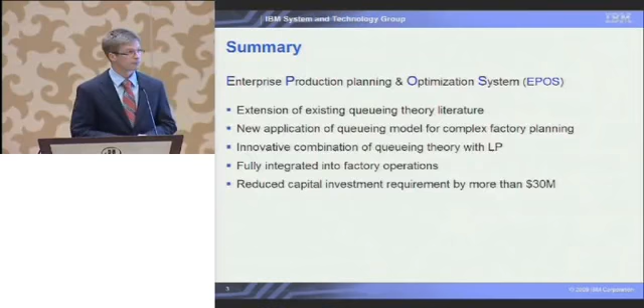What I want to cover in the next 30 minutes: first, I want to briefly introduce semiconductor manufacturing at IBM. Then I would like to talk about the business requirements which initiated this project. Then I would like to talk about the modeling approaches we have chosen, which is quite a challenge to put together in these few minutes. Finally, Stephen will talk about the implementation of this system and the benefits IBM gained from it.

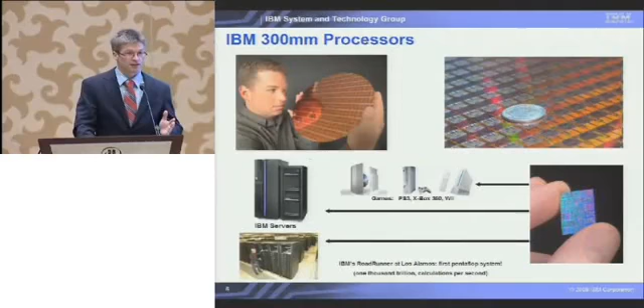So where do those chips we produce go into? First of all, we produce for our internal supply chain. That means we produce the processors for our server systems like System P and System Z, as well as our supercomputers. But, and that may be more relevant for those in the room who have children, we also produce the processors for the major gaming systems like PlayStation, Wii, and Xbox.

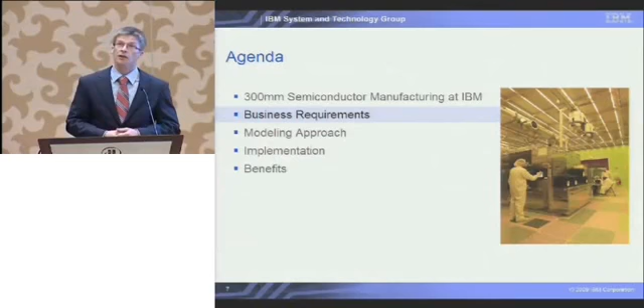So, what were the business requirements which initiated that project? I have to go back to 2006, when we started planning activities for a major factory expansion. We were faced at this time with increased complexity in our processes in terms of number of process steps we have to undergo and the number of involved tools.

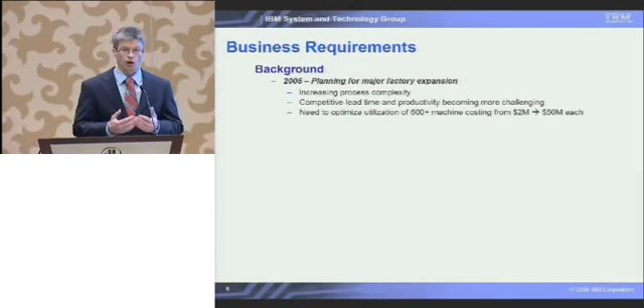Furthermore, we had to ensure that we maintain competitive lead times and competitive productivity within this more and more complex environment. Considering the enormous cost of our machines, it's more or less obvious that we had to ensure we use these machines in an optimal manner with respect to productivity, lead time, and utilization.

This forced us to revise our modeling approaches, which were basically Excel sheet based, backed up by some discrete event simulation models. But due to increasing complexity, the discrete event simulation models became more and more time consuming to maintain and run, so the run times became so long that it was impractical to use them in daily planning business.

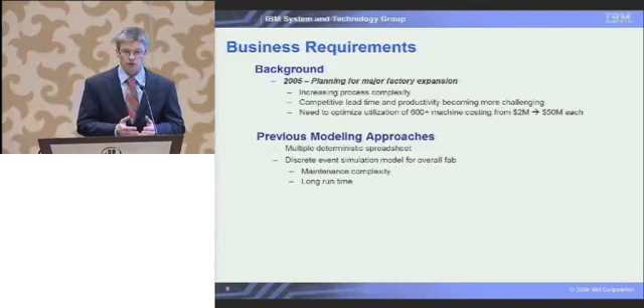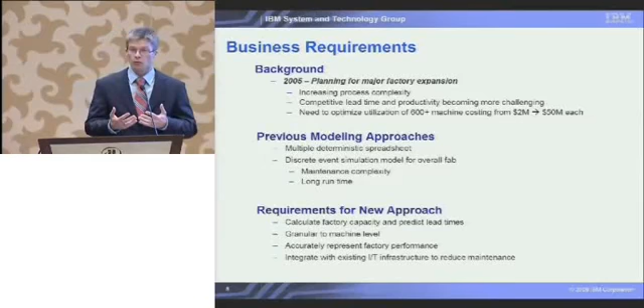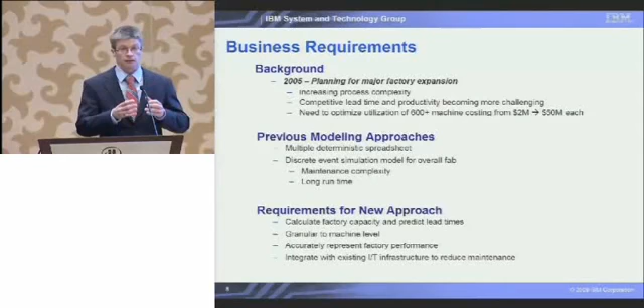This led to the following set of 4 major requirements we had for the new modeling approach at this point in time. First, it was very important for us to combine capacity planning and lead time planning. The second requirement was to really build a model with a higher level of detail, and out of this we want to get higher accuracy.

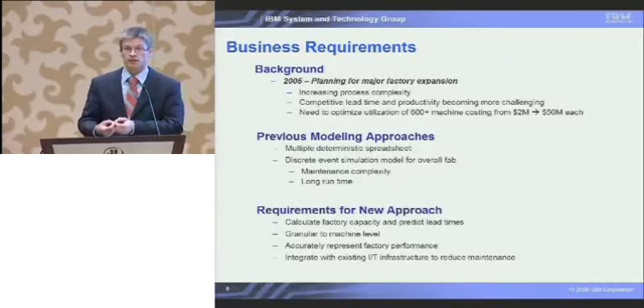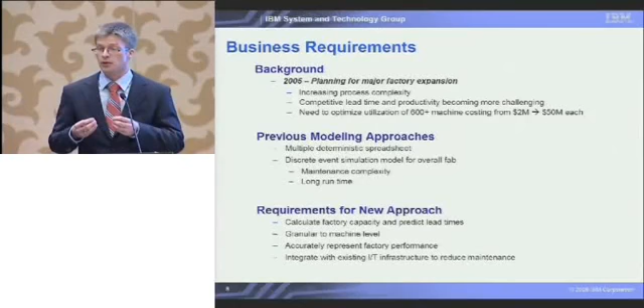...in terms of covering the factory's performance, and finally to make the system really maintainable over years and not just a one shot. This has to really be fully integrated into the IT infrastructure of our factory.

Okay, the modeling approaches. Before we go into the details of the modeling approaches, I would like to talk briefly about the modeling challenges within a semiconductor environment. Semiconductor manufacturing processes are one of the most complex manufacturing processes which exist, at least from my point of view. So there are several dimensions of complexity.

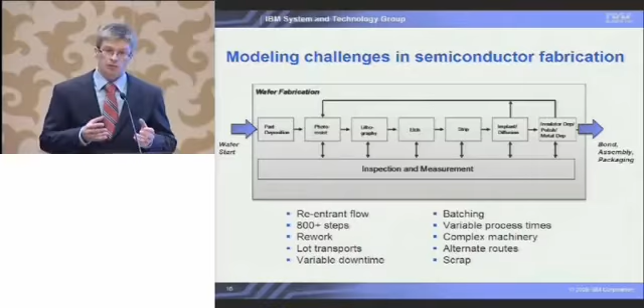First of all, the process flow is what we call the re-entrant process flow. This process flow consists of 800 plus different process steps. The machines on the shop floor have a high variability in terms of downtime, but also they produce a high variability for the process times too. Scrap and rework are important, as well as things like alternate routings and others.

So, as I mentioned before, the discrete event simulation models turned out to be impractical because of the long run times. So the new approach we looked for should be based on analytical methods. So we decided to go for a queuing theory-based approach.

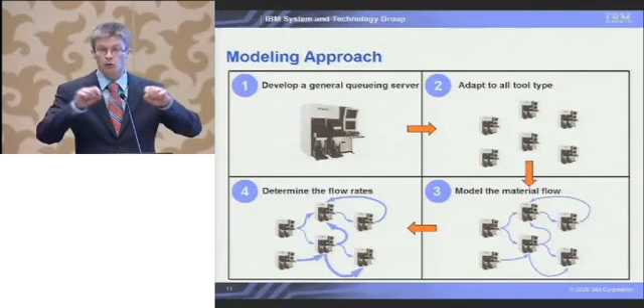In order to do so, we first had to develop a general queuing server model which covers the characteristics of semiconductor equipment. In the next step, we have to adapt this general model to the individual tools on the shop floor. In the third step, we have to model the material flow among those individual tools. And finally, we had to define the flow rates within this material flow, starting with the general queuing server model.

The characteristic of semiconductor manufacturing processes is that at a tool, lots carrying up to 25 wafers arrive from different other tools. And there, at some tools or machines, they get assembled to what we call the process batch. In these examples, we form it up to 50 wafers per batch, and then it gets transferred to the tool and processed there.

So, from a queuing perspective, we had to develop a queuing system which covers lot arrivals, batch service, and, to keep it really general, we intended to allow generally distributed inter-arrival times and generally distributed service times. We also faced the challenge that lot sizes are not fixed, they are varying. So the lot size itself is also a random variable.

So we have chosen a two-stage approach to model this. And by the way, we looked in the literature at this point in time, and there was no model available which covers that all. So the first stage in this two-stage modeling approach is what we call the batching area, which reflects the batch forming process, and the second stage is the batch processing itself.

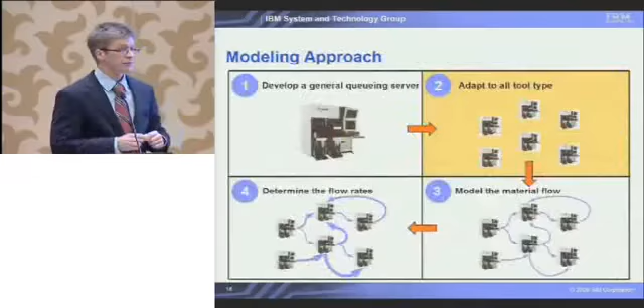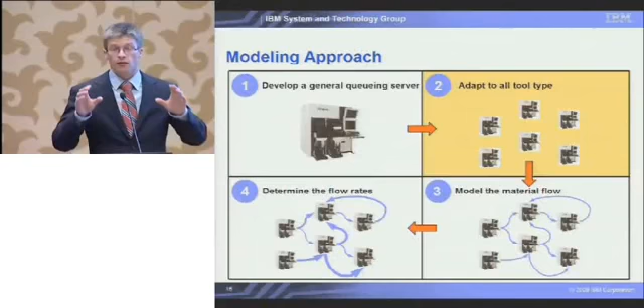So this was a general model, but now we have, of course, individual tools with different characteristics on the shop floor. So what we had to do in the second step was adapt this general model to all the individual tools.

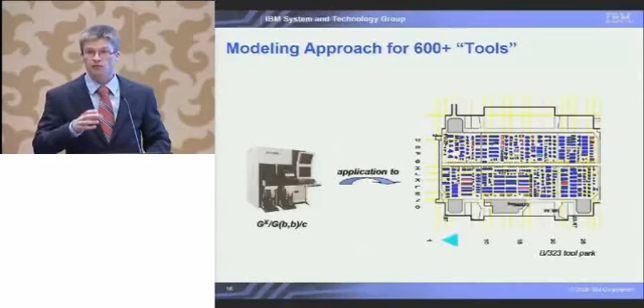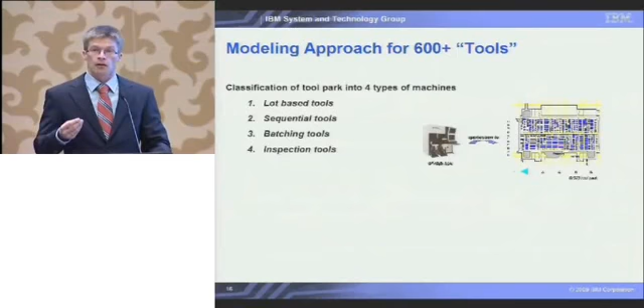Since we have more than 600 tools on the shop floor, you can imagine that we don't want to do this for each individual tool. So therefore, we have introduced a classification, what we call tool types. And we figured out that we have basically 4 different tool types on the shop floor. On top of that, we have split the service time of those tools into 2 parts.

The first portion gives a fixed time, some setup conditioning time at the tool, and the second part we call the variable time, whereby the variable time depends on the number of wafers in the process batch. Based on data we collected in our manufacturing execution system, we have been able to determine the fixed time and the variable time for the different tools in those tool types, depending on the tool type itself and the process which runs on this tool.

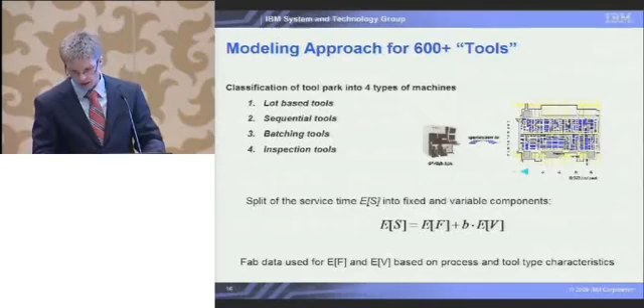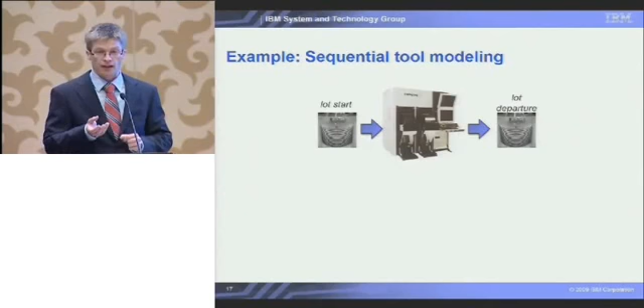As an example, I picked up here what we call the sequential tool. At the sequential tool, a lot arrives, and out of this lot, a wafer gets released into the process. The process itself in the tool is a set of sub-process steps. Finally, all wafers get collected and released as a lot again at the end.

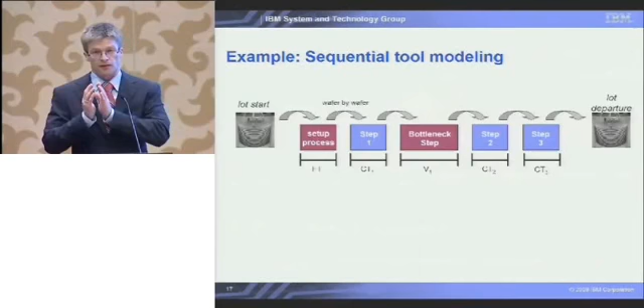So how did we model this? We modeled this as what we call in queuing theory a tandem queue, whereby the first queue of this tandem represents the capacity limiting bottleneck steps within the process. By this, the first queue represents the capacity of the tool. The second queue represents all remaining non-bottleneck steps, and by this it just represents the delay, because we introduced this as an infinite server system.

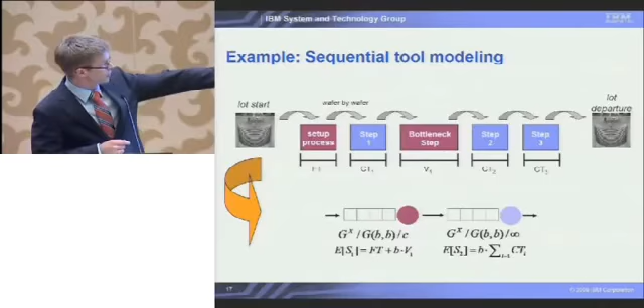Okay, so now we have models for the individual tools, but now the question is how do we model the material flow among them? So we have to connect them.

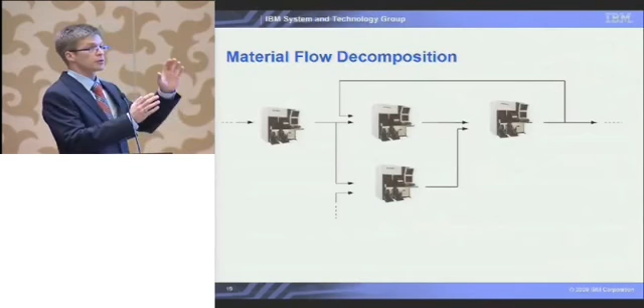As already mentioned, material flow in semiconductor manufacturing is reentrant. What does this mean? I would like to illustrate this at this snapshot of our material flow. These are the tools and the process flowing among the tools, and you see that the arrival process at one machine on the shop floor is not only triggered by the departures of upstream machines, it consists also of the departure streams of downstream tools.

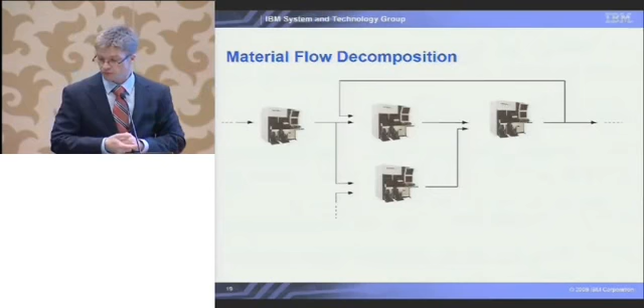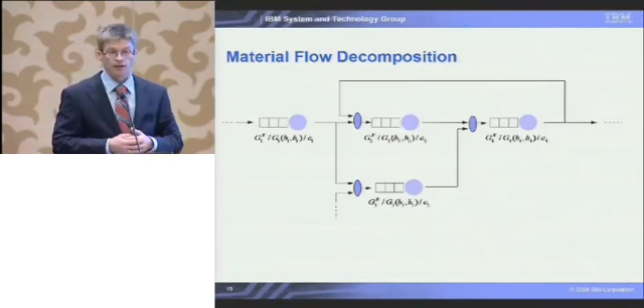So what we had to do now, we have to model each of those tools according to our general queuing model. And then in order to calculate the queue lengths, and by Little's rule the queue time at each of these individual machines, we have to know two things. First of all, the service time behavior in form of the mean and the squared coefficient of variation. That's what we determined in the second step from our data from the MES system.

And we had to know the arrival patterns. The arrival pattern is not an input because this is caused by the structure of the material flow and has to be calculated according to this structure of the material flow. How can we do this?

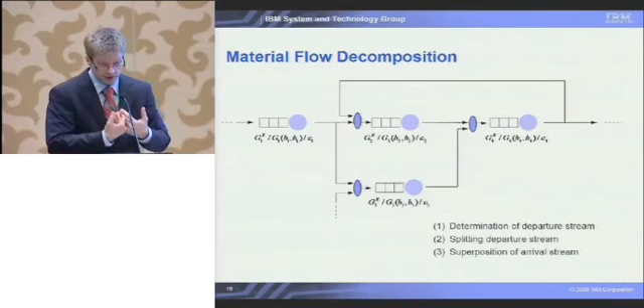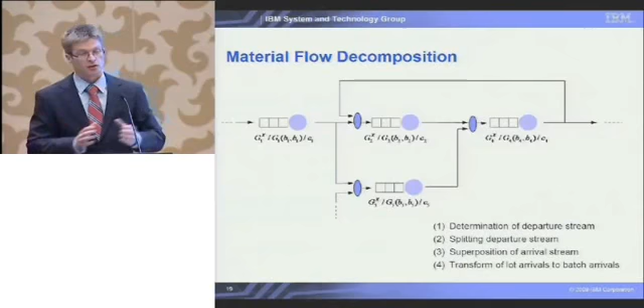First of all, obviously, we have to determine the departure process at each of those machines. In the second step, we have to split the departure because there might be different pathways through the network with alternate routes. In the third step, we have to superpose different arrival streams because we could have different predecessors. And finally, arrivals take place as a lot and batch takes place, and service takes place as a batch, so we have to transform the lot arrivals into batch arrivals.

And since this is a reentrant process flow, we cannot do this sequentially. We have to do that at once. Mathematically spoken, we have to create a set of equations, in this case a set of linear equations, to calculate the mean and the squared coefficient of variation for the inter-arrival times. And this was done in the following manner.

First of all, we transform batch arrivals into batch departures. This is for the departure process determination. Next, batch departures get turned into batch arrivals by splitting and superpositioning. In the third step, those arrivals which take place as a lot get transformed into batch arrivals by the transformation I showed in the first step of the approximation. By this we have an expression of lot arrivals as lot arrivals. This is basically the set of linear equations. We call this the traffic equations in queuing theory.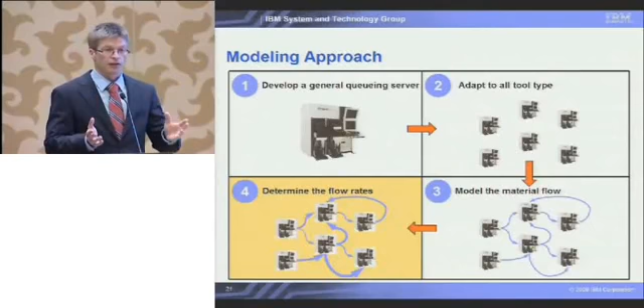So this was now the model of a material flow itself. But this assumes somehow already a given routing matrix. In the last step, we have to define the flow rates through the network. Finally, we have to define the routing probabilities. And since we have alternate paths in the network, this is not trivial.

This snapshot shows the multiple pathways for 3 products through 2 sequential steps in operation. The question we have to answer now is how to set the probabilities each of these pathways will be chosen. How did we do this? We did this by introducing a linear program to set the routing probabilities for alternate tools.

And the objective function of this linear program has to reflect the behavior of a dispatching system on the shop floor, because the dispatching system finally determines the flow intensity through the fab. And the dispatching system tends to load balance the utilization of alternate tools.

So first of all, the objective function has to minimize the sum of the mutual utilization differences in a set of alternate tools. But in order to really make this as productive as possible, or in our words, to really bring this load balance to the lowest possible level, we had to add another term, which is a weighted sum of the tool utilizations. As a formula, it looks like this. And you see at the second term in the sum this factor phi, which is basically the weight.

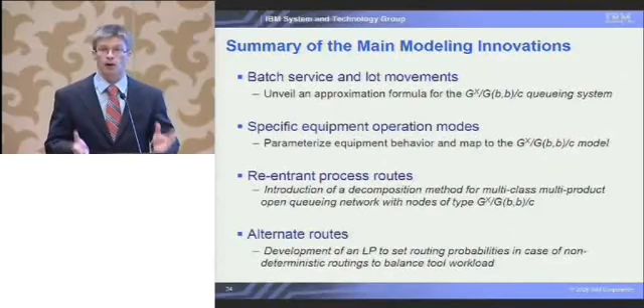And at this stage, I would like to hand over to Steve to talk about implementation and the gained benefits.

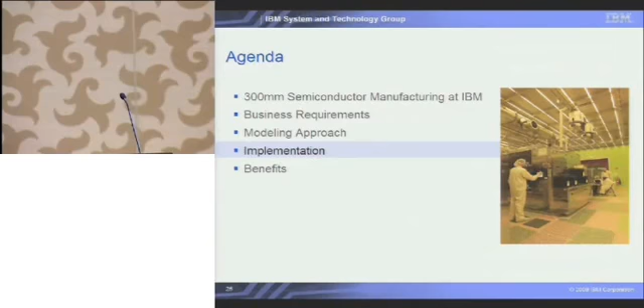Thank you, Horst. I'm going to spend the rest of our presentation time describing for you some of the essential aspects of how we implemented the innovations that Horst just described, and then I'll conclude with a couple of examples of how this analytic solution has provided great value to IBM and our semiconductor manufacturing operations.

As we mentioned at the onset, the factory in East Fishkill is highly automated and has a very advanced IT infrastructure. One of the benefits of that is that we record the actual processing times for every lot as it moves through every machine on its route. So we were able to create in the implementation of the EPOS system an automated extraction of that information, transformation of it into the formulations that Horst showed, and then a loading of that into the EPOS database.

That information, once it's loaded, then becomes the foundation for executing the analytic model that Horst described. But as you, I'm sure, understand, past performance is not always a predictor of what we're going to do in the future. And so we also provide in the implementation of EPOS a Java-based GUI for the users, primarily the industrial engineering users, to put sort of up-to-the-minute information about processing times, new machines, new process flows into the model.

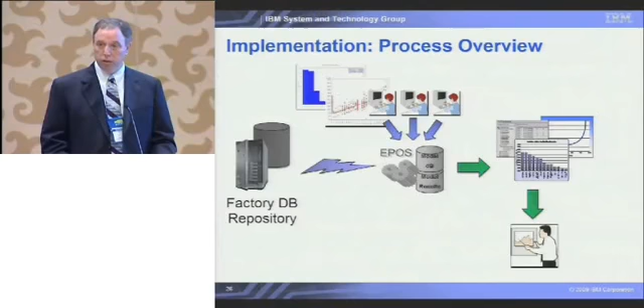And in addition, we use that information for team-based activities across engineering, manufacturing engineering, development engineering, and industrial engineering teams that are responsible for managing and improving the performance of subsections of the factory.

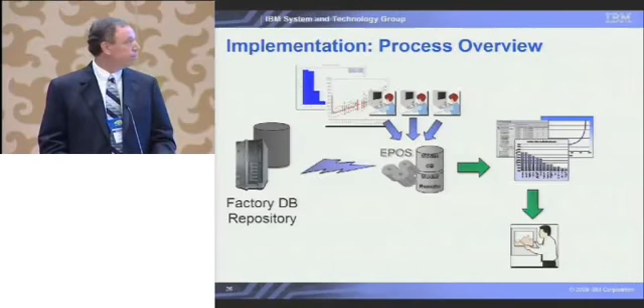I want to emphasize, beyond the technical implementation, that we're also very proud of how we have been able to succeed with EPOS in the sense that we've adopted it, and with its decision support capabilities, we've been able to enable a new organizational culture. We've been able to change the organization.

Horst mentioned at the onset that, as I'm sure many of you know, one of the keys to success for projects of this nature is strong management support. We clearly had that, and that enabled part of this. But another important part was persistence and vision.

In the course of developing the program and the methods that Horst described, there were always delays, setbacks, and complications, and I want to give great credit to the team members, particularly Ben, for his persistent vision that kept us on track and drove this through, and then executed the kind of education and articulation of the vision of where we were going across the organization, so that now we have fully embraced this. It's part of our ongoing business process.

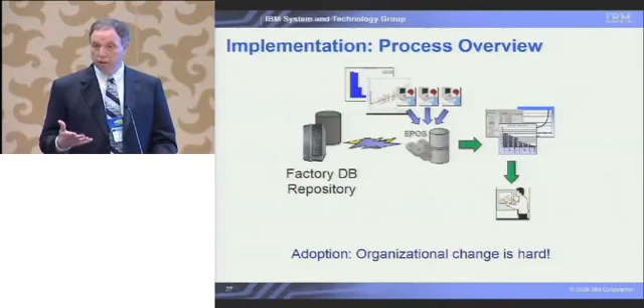To illustrate the value, I'd like to wrap up by showing a couple of examples of how we have used EPOS in East Fishkill.

We mentioned at the beginning that by 2005 we were facing a challenge of expanding the factory significantly. One part of that challenge is to determine how much investment we're going to make in new equipment and whether that investment is going to meet our lead time objectives. We've used EPOS for this.

Recently we've used EPOS to address this issue, and we're actually using it up to the minute this week as we begin to execute this expansion. How do we do that? Essentially, we represent future production schedules to the EPOS model. We execute the model, and we get a picture of bottleneck tools.

Those bottleneck tools then become the seed or foundation for a collaborative process that engages development, manufacturing, and the industrial engineers in defining what the new tools in the factory expansion will look like. Very often, what we purchase and put into the new factory is not just a replication of what exists in the factory, but rather new configurations and new processes.

So we have to collaborate to define new tools that are then loaded into an updated EPOS model. It is run again, and we are able at that point to assess the lead time contributions by machine type in the factory. Through a series of two or three iterations, we can then select and anticipate the effects on lead time from adding or removing additional machines, driving the overall investment down while still maintaining a competitive lead time outlook.

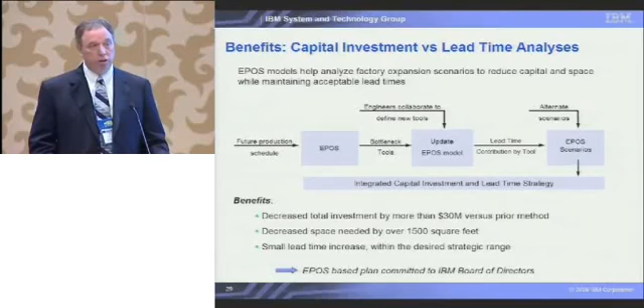At a more tactical level, I'd like to conclude with an example of how we use EPOS to support continuous improvement efforts in the factory.

As I mentioned a minute ago, EPOS predicts bottlenecks in advance, and in doing that we're able to focus our improvement efforts and understand the value of particular strategies in improving anticipated bottlenecks in the factory. As an example, earlier this year, we used an EPOS model to anticipate that some new photolithography equipment, very expensive and very frequently used throughout the process, was going to be a bottleneck.

That information from EPOS, in the form of operating curves showing the trade-off between utilization and lead time, was used to focus improvements on reducing rework, reducing process times, and reducing variability in repair times, which was kind of a new concept to some of the engineering members of this team.

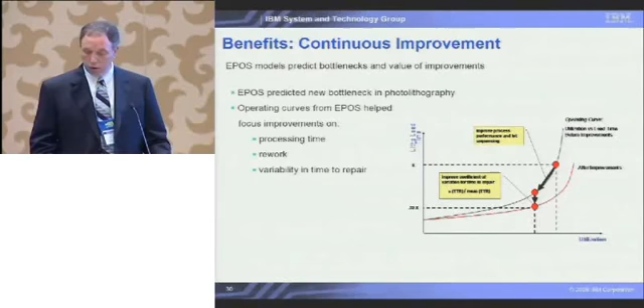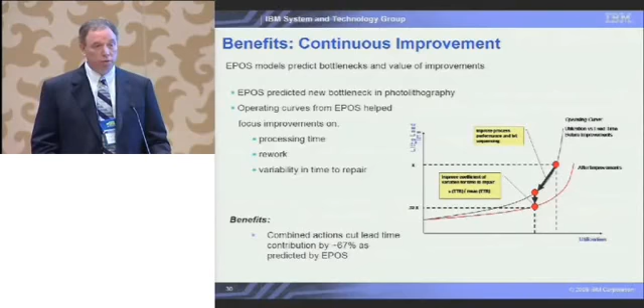What we got out of that in this particular case was a reduction in a significant portion of the factory's overall lead time by about two-thirds. And as it turned out, we found that the performance was quite close to what was predicted by EPOS.

So I'll conclude the presentation portion today with an extract from our letter of endorsement from our executive team. I just want to emphasize in conclusion that EPOS has become a very valuable and unique portion of the way we manage the factory in East Fishkill. And with that, we'll open the floor to questions.

The question was whether the routing probability decisions out of EPOS were fed back into the material handling system to govern dispatching decisions. No, it was completely separate. There is no link between EPOS and actual manufacturing decisions on the floor. It was an emulation of the way dispatching systems work in actuality on the floor.

The dispatching system looks at all the available run paths when a lot is to be dispatched to a machine, and runs at the nearest available machine that can run the process fastest. So in optimizing the spread of routing probabilities, we try to balance the load to emulate what would actually happen on the floor, and also minimize utilizations to emulate running on the fastest machine possible, since we have several machines running at different speeds. We didn't want to balance the load and have them all run on the slowest machines, because that's not what would actually happen. That was the addition of the second term, to minimize and penalize high utilization.

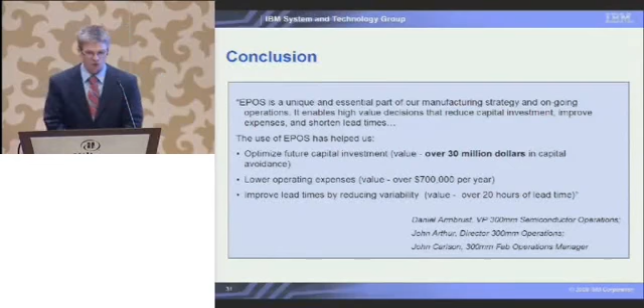Twofold answer—I'll start with the first part. From a theoretical point of view, you have seen the two steps: the general queuing model and the network decomposition. For each of those queuing models, from a theoretical point of view, we validated against discrete event simulation runs, and we found the accuracy is in a range of about 10%, for both the single model and the network. We also did some evaluations on the network part. That was the theoretical piece—now I guess Ben can talk about how we validated in the fab.

The validation in the fab was a twofold approach. One was to validate the parameters input into the tool model—machine reliability statistics, process time statistics, and all those attributes of the individual machines. That's updated monthly by the industrial engineering community, who collect statistics from the factory and measure actual performance versus what was input into the model. That's one aspect of the validation.

The second aspect of validation is the actual output of the individual tool models—the expected utilization and lead time of the tools. By nature of the queuing calculations, it's an average expected lead time and average expected utilization. So in periods of stability for individual machines, we'd look at the actual statistics of the machine—for a given week, the average reliability pattern, the average process time, and the statistical distribution around that—then validate the actual utilization and lead time against what the model predicted. It's hard to do on the fly because queuing modeling looks at an average and a distribution, so we'd take a longer period of time, look at the machine statistics during that period, and validate against the model.